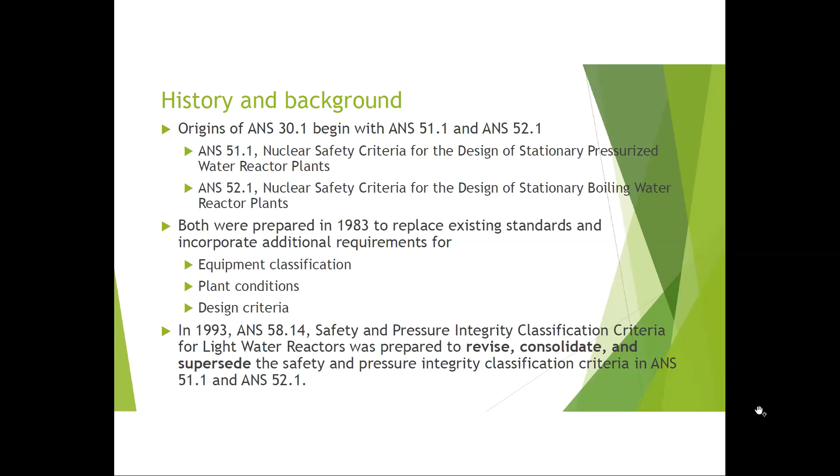So at this point in time in 1993, the standards authority were seeing, evidently, I wasn't privy to that, but obviously there was some discussion on why do we have two standards for light water reactors? Let's just have light water reactor standards instead of a BWR and a PWR. This was obviously the first step in getting that done, with the creation of 58.14. Next slide, Pat. Again, this is me projecting what the thinking was at this time.

This consolidation of safety and pressure requirements led to the creation of a working group in 1993 for ANS 50.1, called Nuclear Safety Criteria for Light Water Reactors. 50.1 was to revise and consolidate the remaining requirements in 51.1 and 52.1, which were the deterministic design criteria, into a single document. It also started addressing the topics of design that were under development at that time, and this included PRA. But after 7 revisions of 50.1, comments were unable to be fully resolved, and the project ended in 1994 without publication of an approved standard.

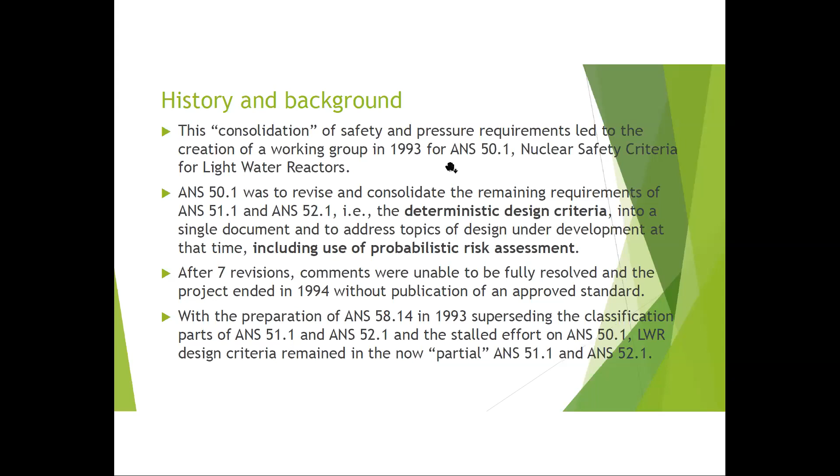With the preparation of 58.14 in 1993 superseding the classification parts of 51.1 and 52.1 and the stalled effort on 50.1, the LWR design criteria remained in what were now partial 51.1 and 52.1. Next slide, please.

To address this gap, again, the Standards Authority knew they had a gap problem. They had a disconnect. So they reinitiated the ANS 50.1 working group in 2003 and 2011 to try to complete the document. The 2003 group was headed up by Rick Hill, and I was part of that group, and eventually took over the chairmanship of the group. At that time, we worked very diligently trying to get a draft acceptable to everyone, and we were unable to do so.

And the reason was that working group was unable to get agreement from the existing reactors that they wanted this document to see the light of day. The primary reason being PRA was still relatively untested in the nuclear power industry. The standards that are now well developed were just at that time beginning to be developed and prepared. So there was a lot of hesitancy on installing PRA type philosophies and methods and information into standards that were in some of these reactors' approved licensing basis. They just weren't comfortable with that.

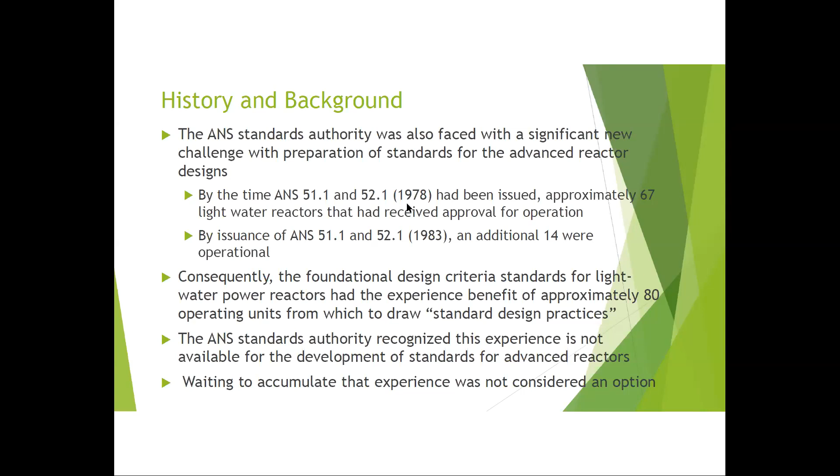With the second abandoned effort of 50.1, it's clear that with approved licenses and extensive operating experience, existing reactors were hesitant to support revisions to ANS standards, which could potentially challenge the status quo. So the Standards Board came to the following conclusions regarding RIPB guidance, methods, and information in putting them into ANS standards. Revisions related to existing standards must be made with care in consideration of the potential impacts on the existing fleet of reactors. And more attention should be made to the inclusion of both deterministic and risk-informed performance-based design requirements during the development of standards for future reactor designs.

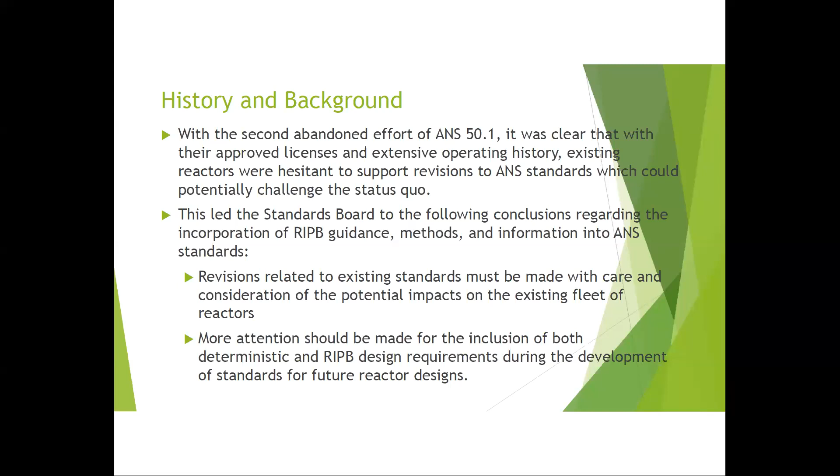You could see that there was already consideration that they have to be treated differently. The existing fleet and the new fleet could not be; one size could not fit all. So, Pat.

First, the paradigm shift affected the ANS organization. There was an inward-looking change made to create a risk-informed, performance-based principles and policy committee. This was an advisory committee of the Standards Board and provided oversight of the ANS plan for implementing risk-informed and performance-based principles into ANS standards. There was also an outward-looking change made to create a joint committee in conjunction with ASME, which is the Joint Committee on Nuclear Risk Management, JCNRM.

This committee was tasked for the preparation and maintenance of consensus standards for the completion of risk assessments, including PRA. These organizational changes were to permit risk-informed, performance-based principles and methods to be addressed for all nuclear facilities in a rational and planned manner. Next, Pat.

Second, the paradigm shift involved ANS structural changes. The Advanced Initiatives Subcommittee of the Research and Advanced Reactors Consensus Committee was tasked with the development of consensus standards for the design, operation, maintenance, operator selection and training, and quality assurance for new reactors, both light water and non-light water cooled. And then on top of that, secondly, a tiered hierarchy of advanced reactor standards preparation was approved.

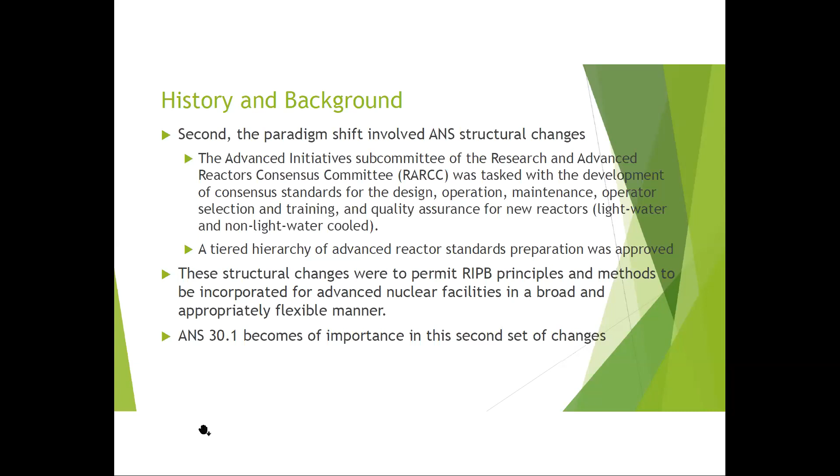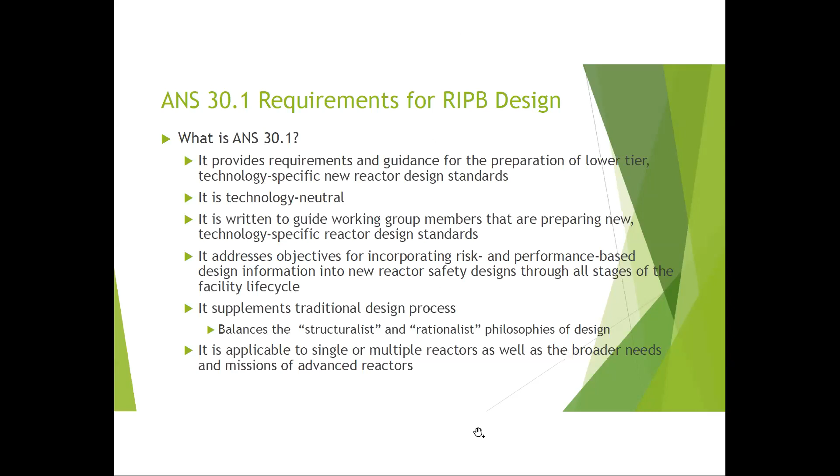Where structuralist is basically the deterministic type, and the rationalist is the PRA type of philosophy of design. It's applicable to single or multiple reactors, as well as broader needs of missions of advanced reactors. Okay. It recognizes the detailed state of practice for advanced reactors is not generally available in the manner of previous large light water reactors. So it does not provide a design process.

It does not discuss implementation of risk-informed performance-based information for any specific advanced reactor technology. It only specifies process elements that, when integrated into the design process, give assurance that we have a minimum necessary structure of design to achieve the full benefits of a risk-informed performance-based design, regardless of the reactor technology or its application.

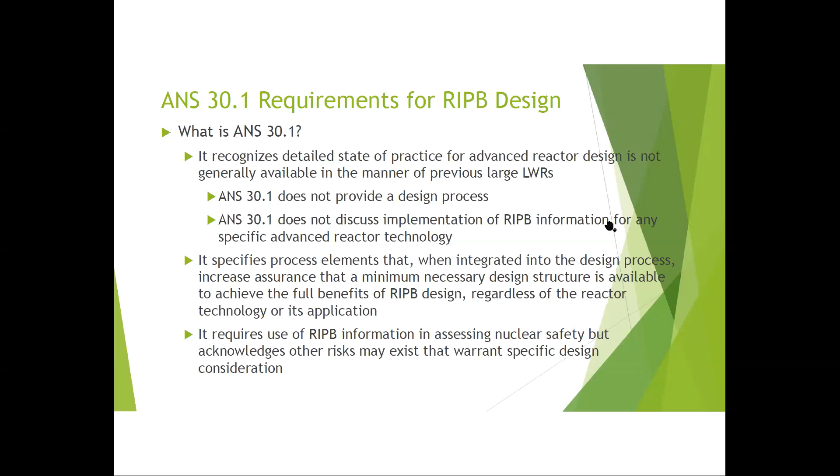It requires the use of risk-informed performance-based information in assessing nuclear safety, but it also acknowledges other risks may exist that warrant specific design consideration.

Pat? Yeah, right. You were behind there.

Okay. Again, while the state of practice for advanced reactors is not generally available, 50 years of PRA application to the current nuclear industry has certainly established the state of practice for the realization of systematic and robust risk-informed performance-based results as derived from the industry-accepted PRA methods. This risk-informed performance-based state of practice is defined in this standard by 4 high-level and relational elements, which are to be applied during the preparation of new reactor design standards. These 4 elements are as follows.

The interdisciplinary design process is based on methods and processes of the system engineering discipline, which addresses the need for sound system engineering practices. The development of principal design criteria, which addresses regulatory processes. The defense in depth process, a defense in depth process that is structured and systematic, with decisions based on a coherent system of measurement of need and measurement of adequacy.

And then finally, the evaluation of the design is conducted using complete plant response or event sequence information in order to establish competent safety cases from industry accepted hazard analysis processes. Yeah. Let's look at each one of these individually. Like I said, there's very few of them, there's only 4.

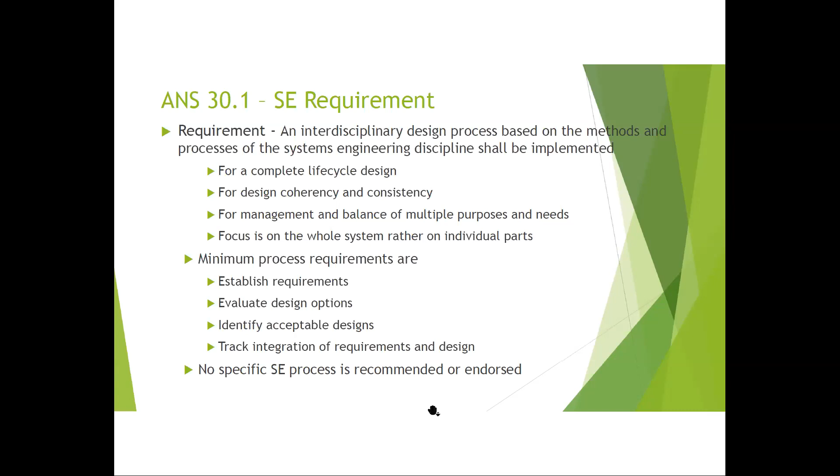All right, second, Pat. Principal design criteria requirement. The requirement is the preparation of and compliance with principal design criteria for a proposed new reactor design shall be completed. This is because PDC establish design, fabrication, construction, testing, performance requirements for structures, systems, and components important to safety. PDCs are required for all LWRs and non-LWR reactors licensed under 10 CFR Part 50.

It requires the proposed PDC to demonstrate its applicability to the public safety as well as fundamental safety concepts such as necessary safety functions and defense in depth. It recommends preparation early in the design process, but acknowledges the criteria may be revised and changed as the design progresses. There's no expectation that you have to establish your PDC for time in perpetuity. Examples are provided, but no PDCs are recommended or endorsed for any specific technology or reactor design.

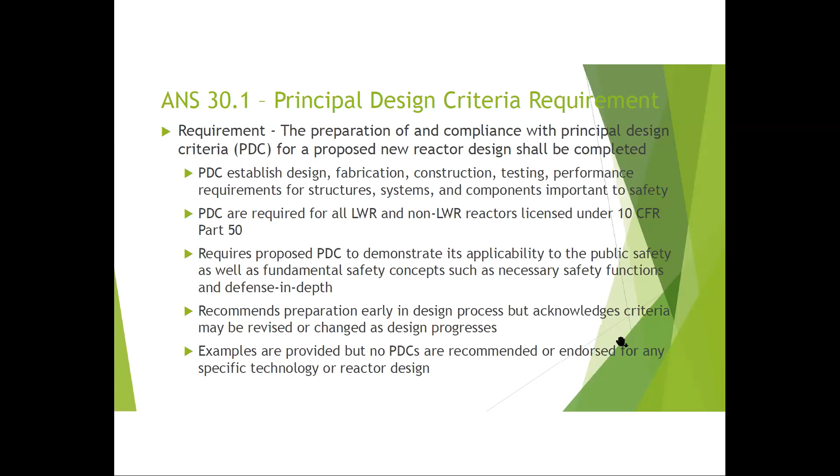Third one is structured and systematic defense in depth. The requirement is a DID process that is structural, which means relationship of parts to the complex whole, systematic, which means it's repeatable, and with the decisions based on a coherent system of measurement of need and adequacy shall be implemented for the evaluation, prevention, and mitigation of hazards.

The standard provides 5 attributes that integrate to achieve a robust philosophy of defense in depth. There's also 8 objectives for the use of risk-informed performance-based methods and information in the assessment of DID. It provides an example using the IAEA 5 levels of defense in depth, but this only is an illustration to demonstrate what we mean by structured and systematic defense in depth process. No process for defense in depth evaluation is recommended and endorsed in the standard.

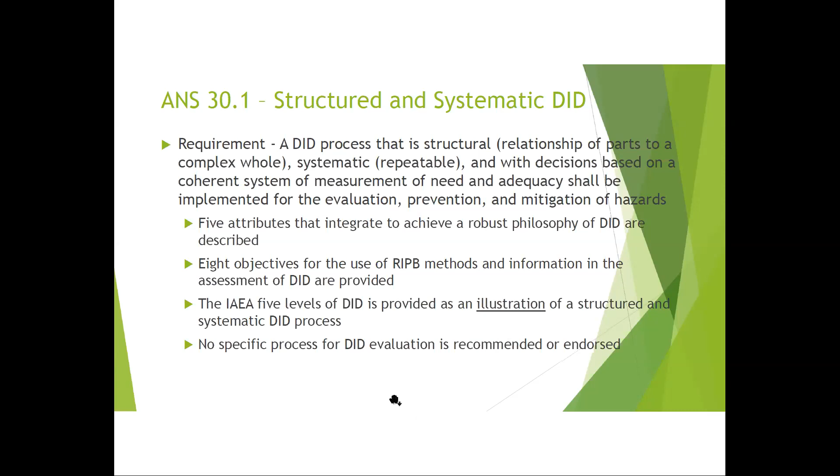Okay. Now the fourth and final one is the event sequence basis assessments. The requirement for that is accidents used for the purposes of licensing shall be derived from a spectrum of plant responses, which include initiator, plant response successes and failures, and a defined end state. The standard discusses the generation of this spectrum in general terms. A detailed PRA is not required or recommended for all design circumstances.

The uses of PRA event sequence-based assessments recognize the reactor design will evolve and therefore allows for optimum selection from multiple design options. It also provides recognition that identified successes are just as important as identified failures. It allows a natural transition from design goals to design requirements, and provides realistic risk profiles to be determined. Again, the sequence-based information is a purposed output of industry-accepted risk-informed performance-based methods and analysis. So this is nothing new. Next one.

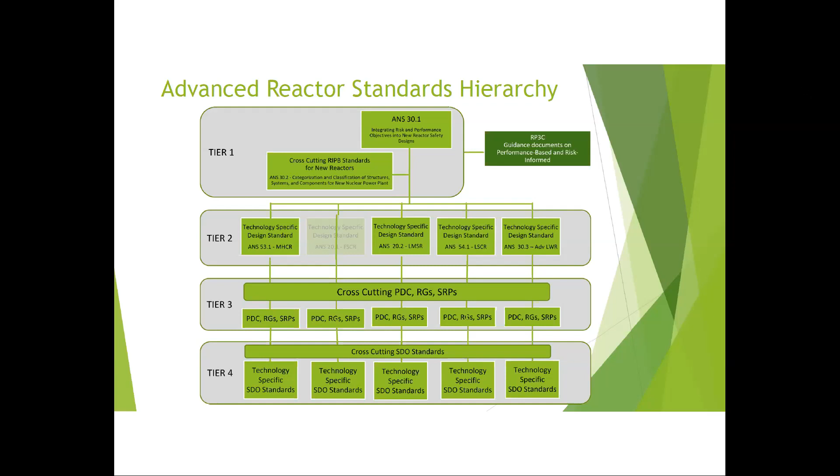But until it matches something that I can say, yep, okay, reactor X meets this standard, or is pretty close, and we have to do these slight modifications because they're really good ideas. But until it does that, how do you expect success? You were imposing processes on a standard that doesn't have processes in it. The standard, it says at the last slide, people are imposing thoughts on the standard that don't exist. They're not applicable. That's not imposing. I'm just asking you to standardize what we do. That's what a standard is for. It's a standardization of a process, and it standardizes industry practice.

We have 50 years of PRA experience. And I have 40 of them myself. We have 50 years of PRA experience. Yep. And the standard says that 50 years of experience says these 4 items are what you need to have a robust, risk-informed, performance-based design. Those process elements. How you implement those process elements may widely vary, and it may evolve within a single design process. But those process elements, those philosophies, those pieces of information, however you derive the end result, are needed.

Now, if I'm incorrect, if the working group is incorrect, there may be 5, there may be 6, there may be 7 coming out of the PRA experience of 50 years. There may be 3, there may be one that needs to be dropped and another one added. It's these 4 process elements: a system engineering process, principal design criteria, structured and systematic defense in depth. We can't do defense in depth the way we did before. That's been acknowledged. Yeah, I agree. That's what LMP said. So it has to be structured and systematic. It can't be just what I think is good enough.